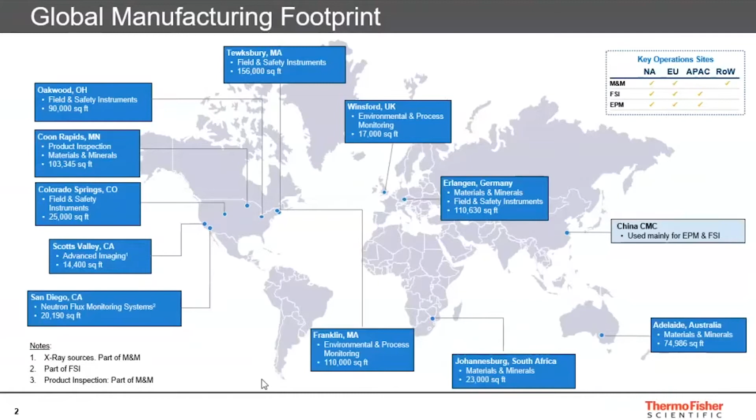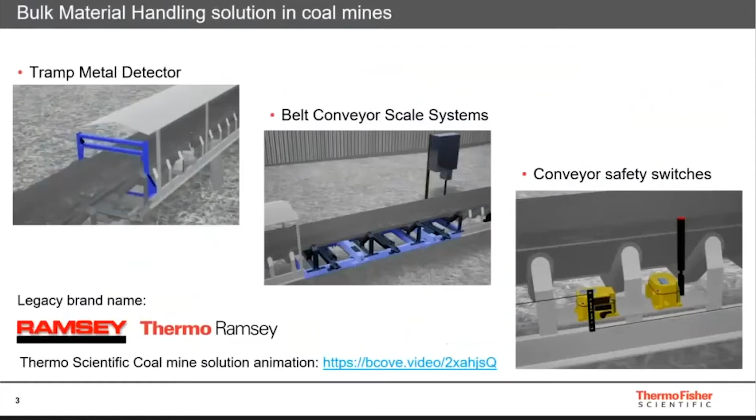So hopefully today we'll look at these things. We're going to look at tramp metal detectors, belt scales, if we get time, conveyor switches, and nuclear density. That'll be the short goal.

One of the most important bits of equipment that we're selling in Australia and throughout the world that we manufacture is our tramp metal detectors. These are really only going to do two things. They're an insurance policy, a cheap insurance policy. They're either looking after your crusher, or if you're at the mine, they're looking after your belt for belt rips.

I had an interesting experience not too long ago where a bucket tooth that weighed 140 kilo got lost from a bucket, ended up through the crusher and then on the customer's conveyor belt. So all the metal detector is going to do is look for metal on your belt, trip a relay and stop. So we're going to protect your crusher, we're going to protect your pulverizer, we're trying to stop any of those jagged rock bolts or steel bolts ripping into your belt, or quite often here in Australia, we are trying to stop the metal getting onto the ships at the ship loaders.

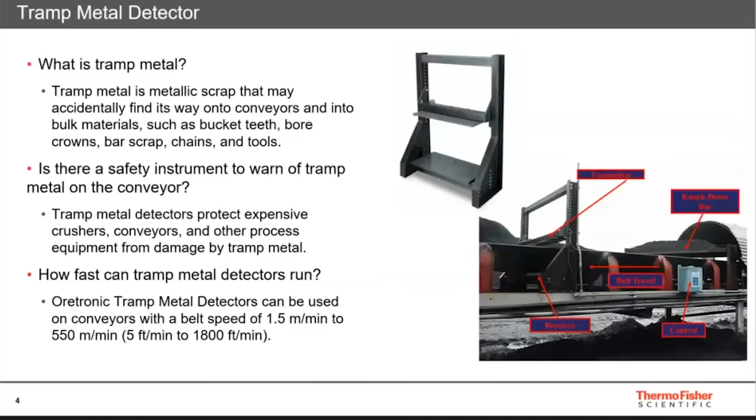We've found quite a bit of a market in BHP Western Australia where we put these on the pile reclaimers, on those great big bucket reclaimers. So if they do lose a tooth on that, it's not getting put onto the conveyor. So a very useful bit of equipment, very cost effective compared to the price of a crusher. You've got a $25,000 Australian piece of equipment protecting a $300,000 crusher. We sell quite a lot of these around the world.

And as you can see from that little diagram there, the metal detector will either stop the belt, drop a flag on the belt so someone can find where the metal is, send off an alarm, or trip a divert chute.

All we're going to do is trip a relay, and then it's up to the customer's imagination. What do they want to do at that point? Stop, divert, catch, boost the magnet, you choose. That's what we can do.

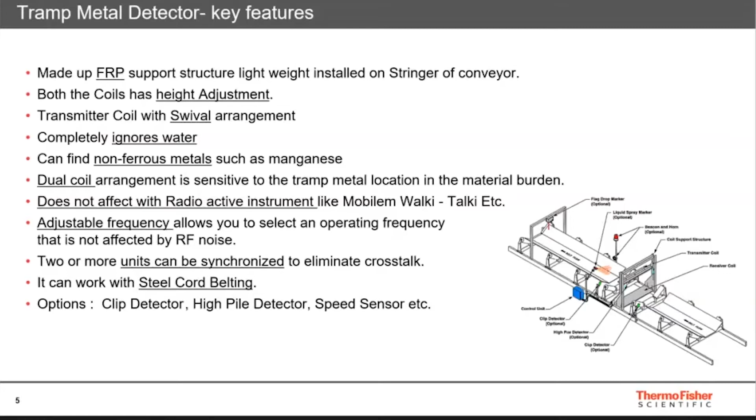Good bit of equipment. One of the other things that we sell quite a bit into the coal industry is just a simple density gauge. And we could use these in the thickener underflow. We can use these in cyclones. We use these in process control, plant balance. There's a number of things. 99% of the time we use a cesium-137 nuclide. Every now and again we use a cobalt, but most times we use cesium. Happy for any questions on this.

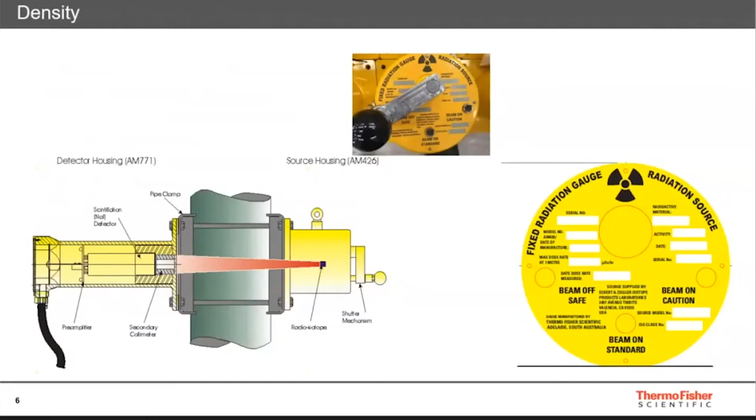This one we only manufacture in Adelaide, Australia, and we send it all around the world. Doesn't matter the application. Whether it's food, whether it's coal, whether it's petrochemical, whether it's paper and pulp, sewage, water treatment, all these things we can do. It's a very useful, very robust piece of equipment.

One of the things that they do in bulk handling a lot around the world, and this is the one that we started 67 years ago, is our conveyor systems. Whether you're in a quarry and you need a 1% accuracy, or whether you're actually on a ship loadout, loading your ship, and you want that 0.125% accuracy, that's where we can use that top left-hand corner 1014 scale. NMI in Australia, NTEP I think it is in America.

And the great thing about these sort of scales, and I noticed there's some people on this webinar from Indonesia who've got more experience in this than I have, is we can prove it. And we prove it over and over again, either against a truck weighbridge, which has got load cells 4 times more accurate than our sort of scales, or against a hopper on the load cells. We can actually prove the accuracy and the repeatability and the reliability of these scales, which is a good thing. And it means in the long term, you're either not giving your customer too much ore, or you're not losing money, all from these sort of scales.

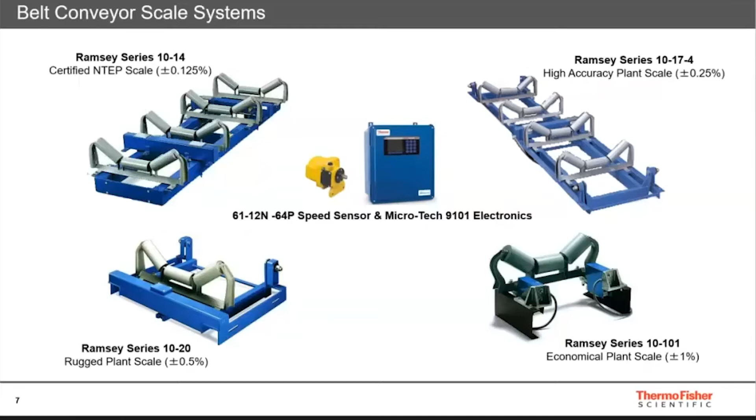Still make them in Adelaide, still make them in America, still make them in Italy, I think. We still make these in Europe, all around the world. Very good, very useful, very solid. That one there is a special one. If anyone ever wants specific information on how we do the NMI, how we do the NTEP, more than happy to answer those questions, more than happy to help if I can.

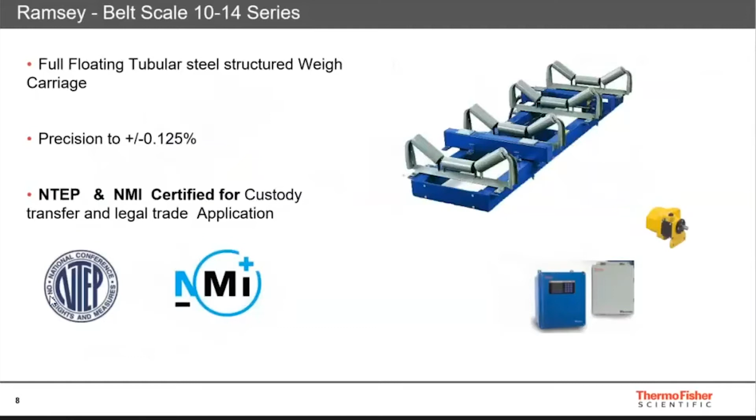Because we are looking at metal detectors on conveyor belts, we look at belt scales and weightometers on conveyor belts, and because in a moment Kevin's going to be speaking about some of our equipment that can go on a conveyor belt, it was just only natural that we would produce and manufacture our own series of runoff switches and safety pull switches and tripper position switches. And unlike a lot of these around the world, ours is still made out of a die-cast steel / aluminium. Robust, especially in hard rock applications. I'm not quite sure how many millions of these we sell a year, but we do sell a lot.

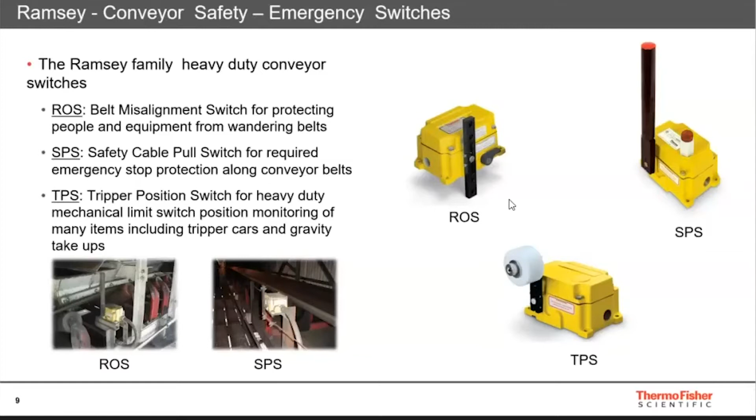And so all that is just a very brief snapshot of BMH in this world.

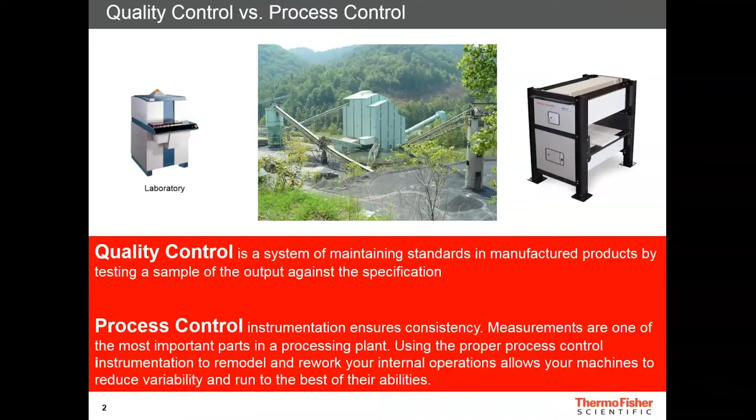So what is the PGNAA technology? Well, it stands for Prompt Gamma Neutron Activation Analysis. The way that works is basically a thermal neutron, whether from a californium-252 radioactive source or an actual electrically driven neutron generator to produce neutrons. Basically, the neutron interacts with the nucleus, and when it impacts that nucleus, the nucleus becomes excited. But very, very quickly, it wants to go back to a stable state. So what it does is give off a gamma ray.

That gamma ray is then read by our detectors inside the analyzers, and it creates a spectrum. Now, each element within that spectrum has what we call its own fingerprint, okay? So a spectrum runs from basically 0 to 512, and for instance, the element chlorine is at 275. So each different channel is where those elements are, and those are the fingerprints. And then based upon the peak of that spectrum at each of those levels, we can determine how much iron is in the sample, how much calcium, silica, etc. That's the fundamental basis of PGNAA analysis.

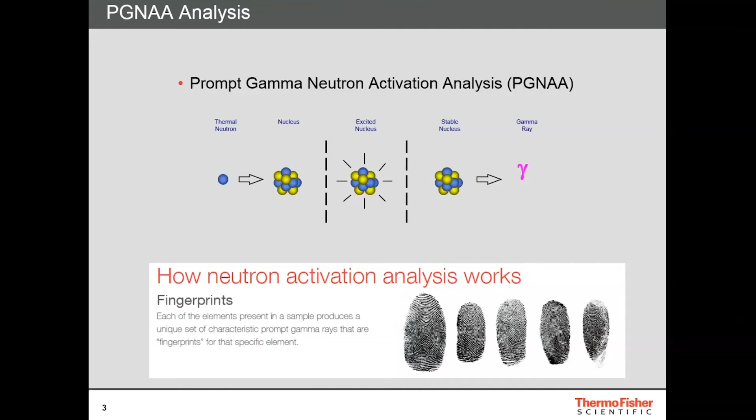Now, you may ask, well, why does Thermo Fisher offer two different analyzers? Well, quite frankly, the CQM Flex is the most accurate analyzer in the industry in terms of coal because it controls the coal through the analyzer in a solid geometric shape. If you look in the back, you've got the hopper which the sampler actually feeds coal into. And then the CQM Flex has a variable speed drive to control that coal profile.

Now, that's important because with any PGNAA analyzer, it's very important that you have a consistent neutron flux. Well, the neutron flux, and I'm no physicist, but the neutron flux is a fancy word for background to signal ratio. So you want as little background as you can and more signal. Well, when the coal volume changes on a cross-belt analyzer, that neutron flux can change, and that can cause some adverse situations to the analysis.

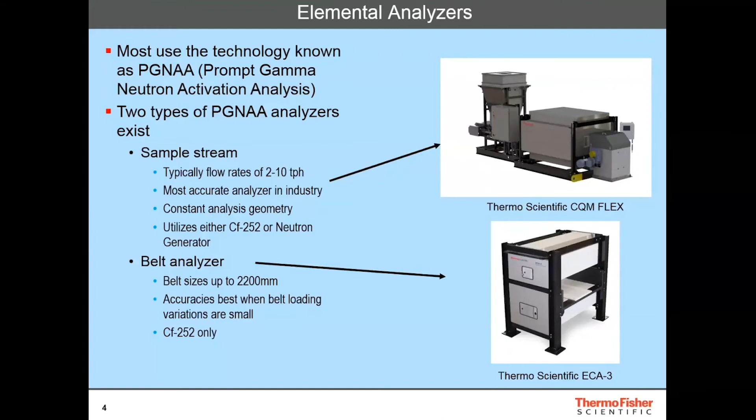So again, this next slide just kind of details what I talked about a little bit earlier. Both analyzers can measure moisture. The moisture meter actually comes integrated in the CQM Flex. And on the ECA3, it's an option that would be a standalone unit.

When it comes to accuracy, you put the ECA3 into the correct application. And when I say correct application, you've got a good belt size, you've got good belt loading, the top size of the material is consistent, then the ECA3 in terms of accuracy can rival the CQM Flex. But in those cases, you can probably think that the ECA3 is about 20% worse in accuracy than the CQM Flex. So it depends on your application and the accuracy that you need in regards to that application.

One key thing about the CQM Flex, however, is it can use either a californium source to produce neutrons or a neutron generator. Now, the positive thing about using a neutron generator is it gives us the ability to measure carbon and oxygen. And with carbon and oxygen, you can get a calorific value measurement without using some assumed values. Now, the key to getting carbon and oxygen measurement is that you have high energy neutrons.

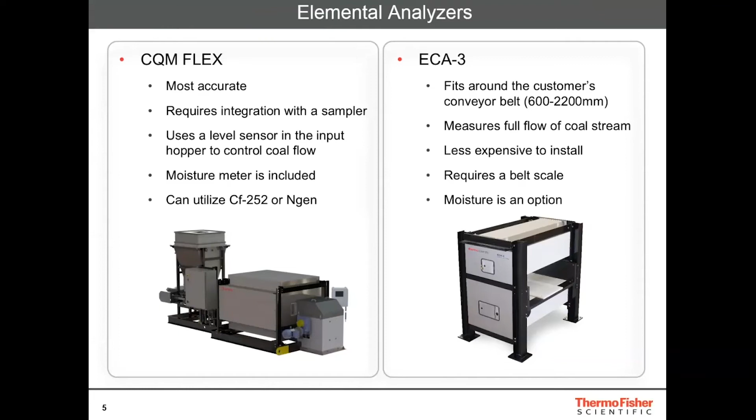So a neutron generator outputs neutrons at 14 MeV compared to californium, which only emits at 2.1 MeV, okay? So the NGen has 7 times greater neutron power, if you will, in terms of energy than californium. That allows the activation of carbon and oxygen, and therefore we can produce those analyses with an NGen in the CQM Flex. The ECA3 only has a californium option.

So in terms of what the CQM Flex measures and reports, total moisture, total ash, but we sum the ash oxides, and that's iron, silica, calcium, aluminum, potassium, titanium, and in some cases sodium. Generally, the sodium needs to be 0.2% of coal or greater for us to be able to detect it. You can detect it at lower levels, but the accuracy is not really there, and it has a lot of noise on the signal, if you will. So generally, sodium has to be 0.2% of the coal or greater.

Other elements are sulfur, nitrogen, chlorine, carbon, hydrogen, and oxygen. And if you see the asterisk at the bottom, it's really only with the neutron generator option that we can offer the carbon and oxygen measurements as well as hydrogen. Calorific value, and then fixed carbon and volatile matter. Again, that needs the carbon and oxygen measurement, so that would be with the neutron generator option as well.

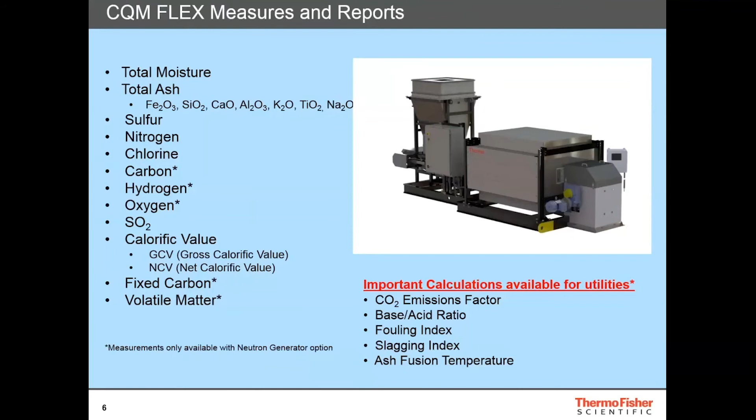The ECA3 doesn't have all of the capabilities that the CQM Flex has, but it can still measure the total ash and the total moisture and the sulfur. Generally, anything but the carbon and oxygen because of the neutron generator situation. And then down below is how we would calculate the calorific value with an ECA using the moisture measurement as well as the as-received ash measurement.

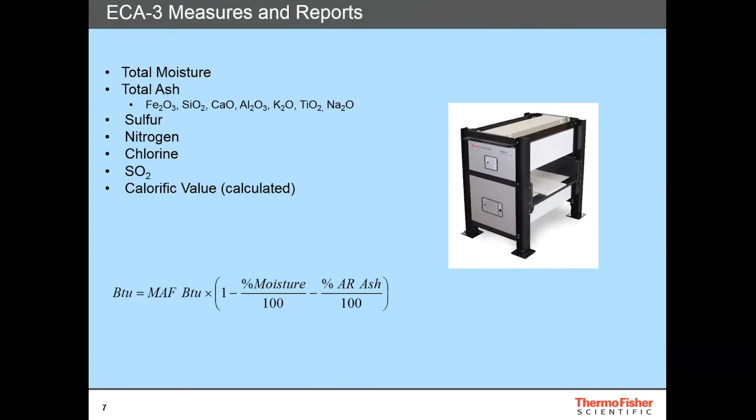But in this case, we also have to assume a MAF CV, and MAF stands for moisture ash free. So basically, what is the heating value if there were no moisture or ash? So we enter that into the computer, then we measure the moisture and ash and provide the calorific value measurement. So, I truly believe with any product, software is kind of like the bow on the present, right?

So the analyzer is doing its thing in the field, but how do you get the analysis? How do you use the analysis? What does an analysis mean? Well, one of our key software packages is called COBOS. It stands for Coal Blending Optimization System. And what this can do is automatically blend your coal to up to 3 control parameters.

So when we think about the example of that train that we mentioned earlier, and we talk about the specifications that a coal mine needs to meet to their customer, whether that's going to a power plant or a steel plant, generally those specifications are more than one, right? So you have to hit an ash target, a sulfur target, a calorific value target, and sometimes even a moisture target. Well, COBOS can basically control up to 3 of those.

So you can go into COBOS and say, okay, sulfur is 1%, calorific value is 5,000 kilocalories per kilogram. And then you tell COBOS what your sources are. So if you look in the left-hand corner, this example is showing a low BTU feeder, a high sulfur feeder, low sulfur, and a high BTU. So you tell COBOS that I have these sources available and this coal quality available. And then based upon the analyzer's analysis and the targets you have put in, COBOS is going to blend all of those coals to that specification.

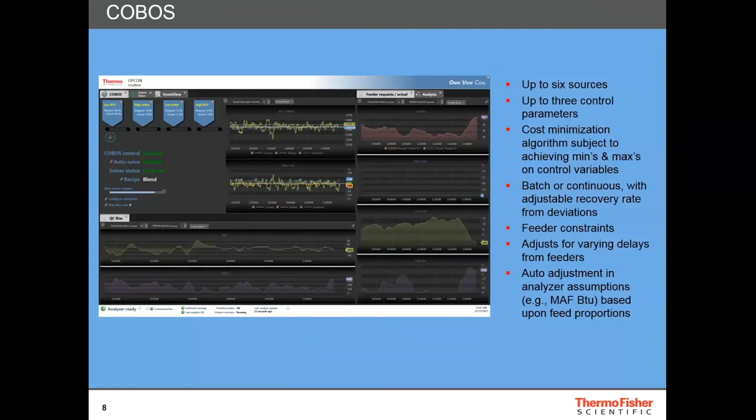that analysis really dynamic. So we've talked about the PGNAA technology, and showed you what the analyzer can do in terms of analysis with the CQM and the ECA. But what does that really mean and how can you really use it? Well, after this slide, we're going to get into some real world examples.

But first of all, at the mine, the ability to sort different quality coals. Mines can have different seams, whether you're a surface mine or a deep mine. So you're going to maybe pull some part of the mine and get a high ash or a low ash or a high sulfur pocket, things like that. Well, think about putting an ECA on the output of the mine, and you can sort those coals in real time and create different piles. And when you create those different piles, you can always blend those back in.

So some of the examples at a cleaning plant: depending on where you're at in the world, sometimes you don't have a cleaning plant. Maybe it's all raw coal. But in regions that do, you can get greater yield and recovery. You can bypass the cleaning plant. We actually have an example of that we'll get into here in a bit.

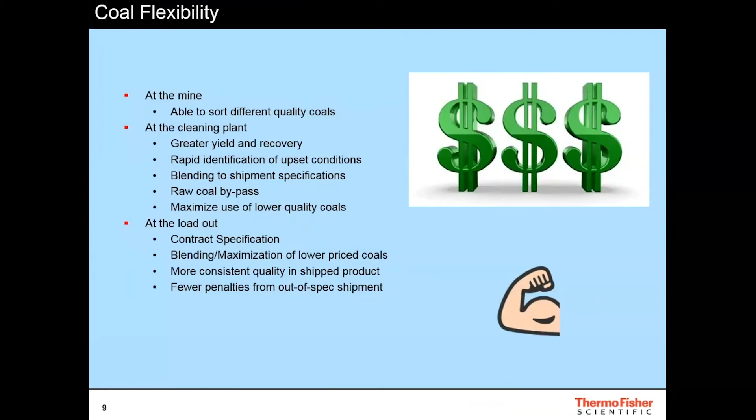So when we talk about sorting coals, here's an example. This was a U.S.-based company that sent trucks to different places based upon the quality of the coal. And this was based upon two things, ash and sulfur. But the thing here is the trucks would go 60 kilometers to the west or 60 kilometers to the east solely based upon the analysis. And if they went to the wrong place, there would be penalties.

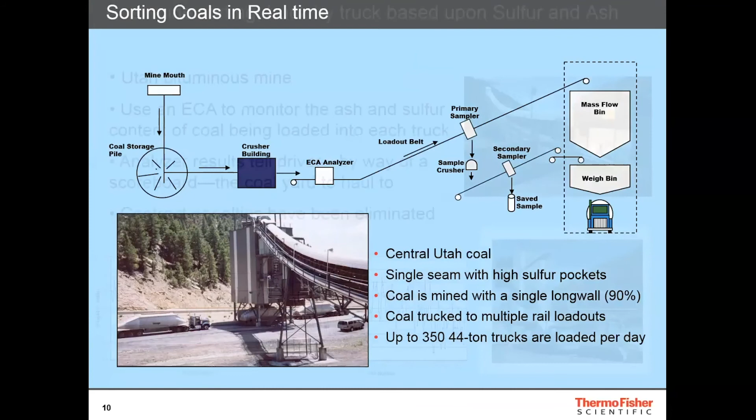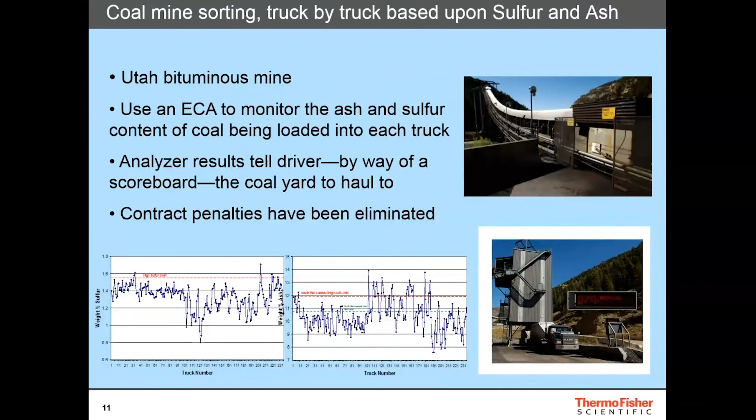And if you look in the bottom left-hand corner, they have a high sulfur limit and a high ash limit. And they were basically able to reduce contract penalties just by knowing where the coal was going to be.

This next example is from a preparation plant in which they mined all of their coal, but the mine was so large they really didn't know the quality that was coming into the plant. I'm not sure how familiar the audience is with coal preparation plants, but to wash the coal, they change the specific gravity within the plants. When you change the gravity, coal floats, rock sinks. But that was not their philosophy. They wanted to keep a steady gravity and then be able to utilize any kind of coal that was made. But they didn't know what was coming in.

So the business case was 1%, and post-analyzer, they actually made just about 3% overall recovery. So that was money that they were able to recover that in the past they basically just gave away. So the investment was very good and very critical for them.

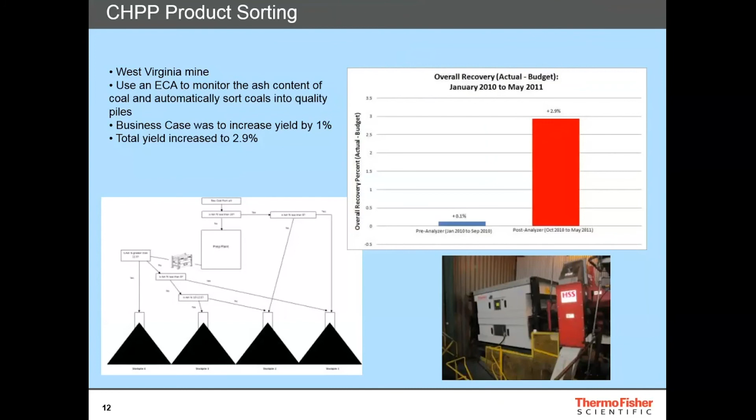The reason why is they did not have that high sulfur coal to be able to get to that point. So that's an interesting thing to understand about Cobos: you can set a target, but you've also got to make sure that you have the coal to be able to hit those targets. In this case, they didn't have the high sulfur, which was okay with them, so they just blended with the lower stuff. But this is an example of how well Cobos can hit the target. It's automatic blending. Cobos controls the feeder percentages and things like that, and it's really good.

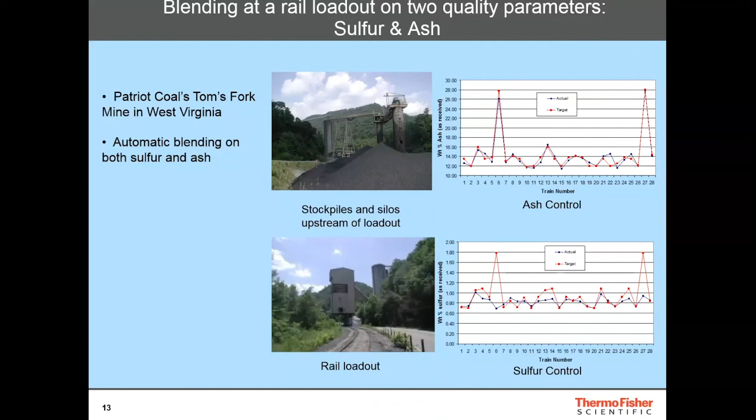So earlier we talked about, at the preparation plant, bypassing the coal from the mine. In this particular example, the coal coming from the mine in spurts was already at the ash level that the customer wanted. So in order to save cleaning costs, they put in a CQM to bypass the preparation plant because there was no need to clean it. So this had a lot of savings in regards to water use and energy use within the preparation plant.

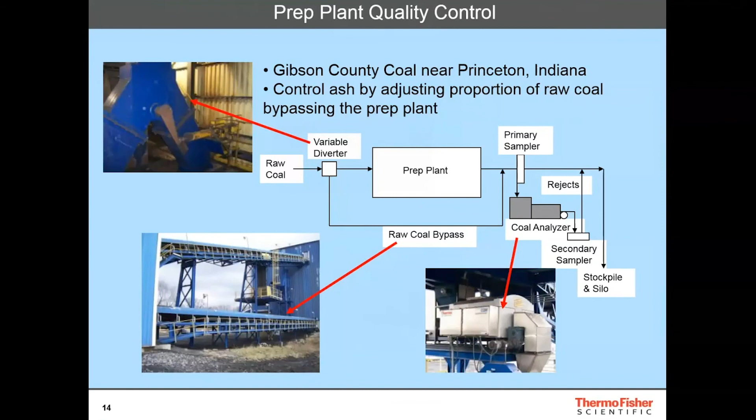So it's really site by site. Every site's going to have a different issue more than likely. Every site's going to have different application things that the analyzer can help with. But these are just some of the examples that we have. This is, I think, the last example of actual customers.